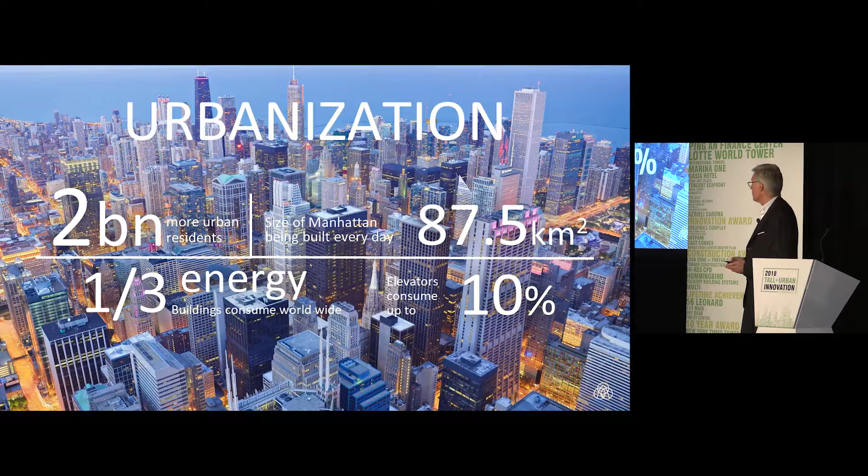Urban mobility. If cities will grow bigger and bigger, denser and denser, taller and taller, urban mobility, mobilization is a big issue. It's about transportation. It's not a singular problem. It's about automatic cars, it's about public transportation, it's about vertical transportation in the building, and it's more than that. It's connecting everything.

What we thought as a company, dealing with a couple of things like passenger boarding bridges, so when you enter the airport of O'Hare or others, you might meet us. We are also in the elevator escalator technology and in the home lift technology as well. So I think we have a fair share of knowledge when it comes to elevators.

But elevator is not what we were looking for. We have workspace costs, what everybody knows. Let's call it 1. We have 10 times as much cost for the leasing space. And additionally, we have 100 times the cost for our staff. So if this is all true, and it's not what I'm saying, it's what researchers will say, then office buildings are not as good as they should be, given the human capital we have in there. And the same counts for residential buildings, and of course, for all other sorts.

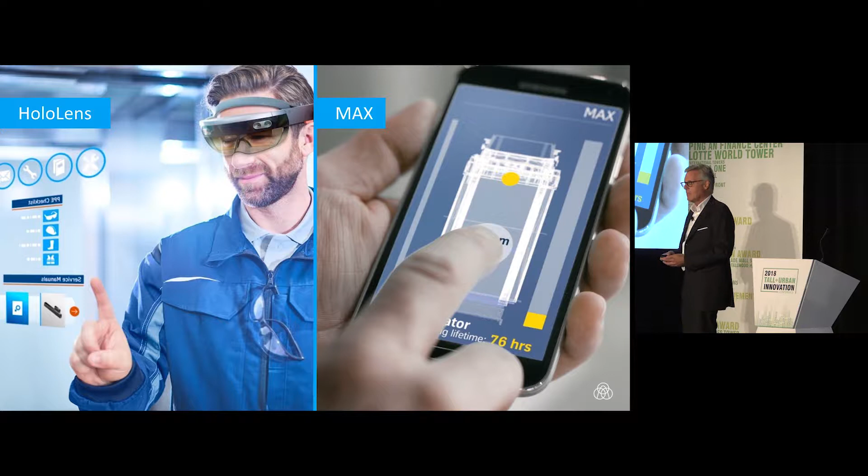But the second thing is now the next German company is coming and telling us about connection between software and engines. This is not the case. We are not in the diesel technology. What we do is in the energy part. So HoloLens, for example, is not a playing tool anymore. For us, it's an incremental part of how we see elevators of the future.

The HoloLens would provide us with ordering the spare parts right at the site. So somebody is sitting on top of the cabin or in the machine room or whatever, and if he faces a problem, he can call the chief engineer wherever he sits and ask for help. So he doesn't have to go away and come back, and we have downtimes in the elevator. We could solve the problem way easier.

And of course, what we call MAX is a little box where we take out all the data those elevators will provide us with. We do this with all elevators. But now we are talking about multi.

So what is multi? We were thinking about how can we reduce the consumption of space. I'll give you an example. You will see the project a little bit later. In Berlin, we are negotiating a building which is not very tall. It's Germany, so 140 meters is something. But the density is high, 4,200 people.

With a single deck elevator, so a normal elevator I would say, we would have used 22 shafts to get this frequency up and down. 22 shafts. With a multi, and this is sort of a drama, the multi comes later. With a multi, we came down to 8. So you can see that the thinking about how a core should be and how big a core should be is probably history. We can save at least 40% of the space. It depends, of course, on the building, on the footprint, and all these individual things.

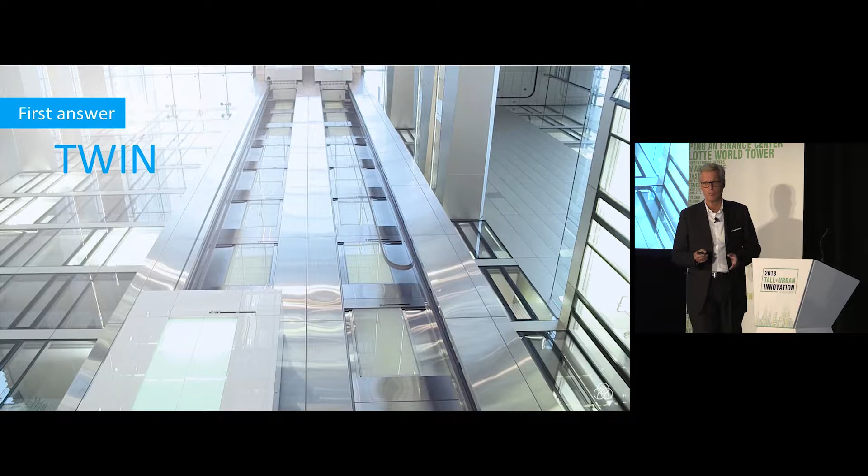And we have something which comes out of a consortium. It was Transrapid, a linear motor technology for trains. Actually, one of those is running in Shanghai, China, for 30 kilometers. And the technology was stopped. It was huge research in Germany, and only Germany can afford to stop such technologies after 15 years of testing. But Thyssen took over all the engineers.

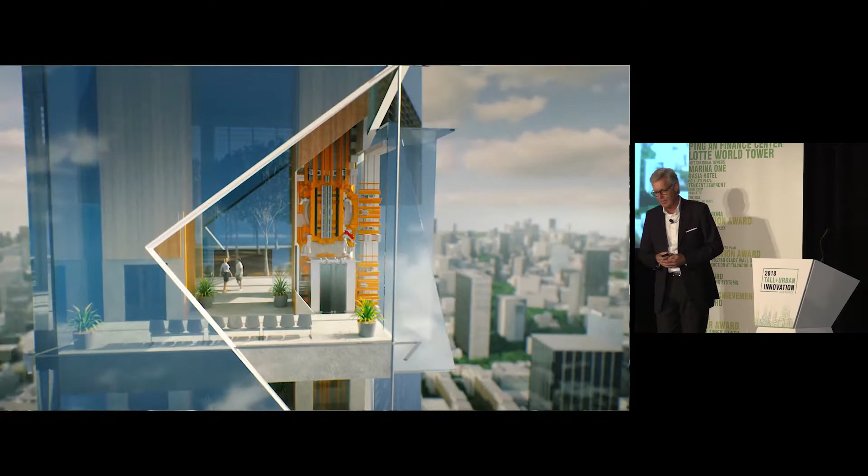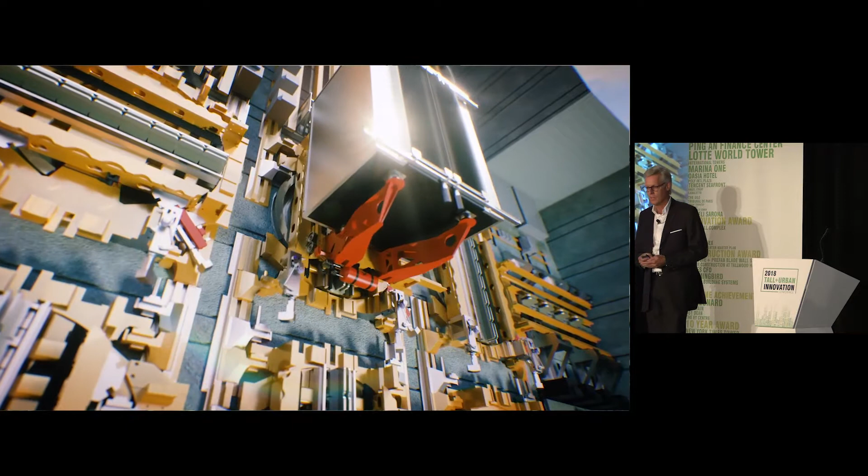How cool is this? So this is when Multi comes into play. Multi is the idea of the Paternoster, the idea of more cabins in 1 shaft, and the idea of linear motor technology, combined into 1 piece of technology. It's a combination of what you see here. It's not a rendering, it's the real world. We have it in a tower, which I will show you in a minute, in the middle of Germany, and we're testing it there, and we're going to make the first projects.

This is the test tower. By the way, it's built by Helmut Jahn. We are in Chicago, so homage to Helmut Jahn. And if I had the knowledge today that I have now, we would not have used a mass damper, we would have put in a rocket, of course. But instead of this, we took 12 shafts.

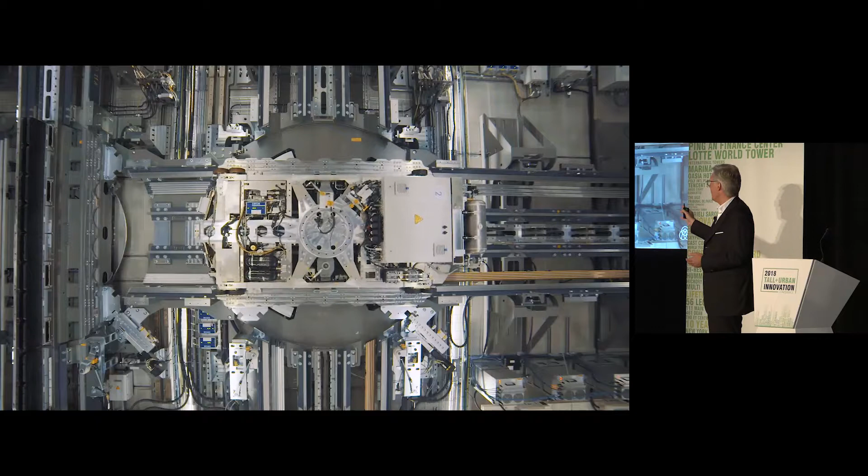And this is how the Multi looks like today. We love technology, you see that, right? It will be all covered when this thing is in your shaft, but for testing it's better to reach every single part. So the principle is we have multiple numbers of cars in 1 shaft, depending on the height, up to 10 or 15 in 1 shaft.

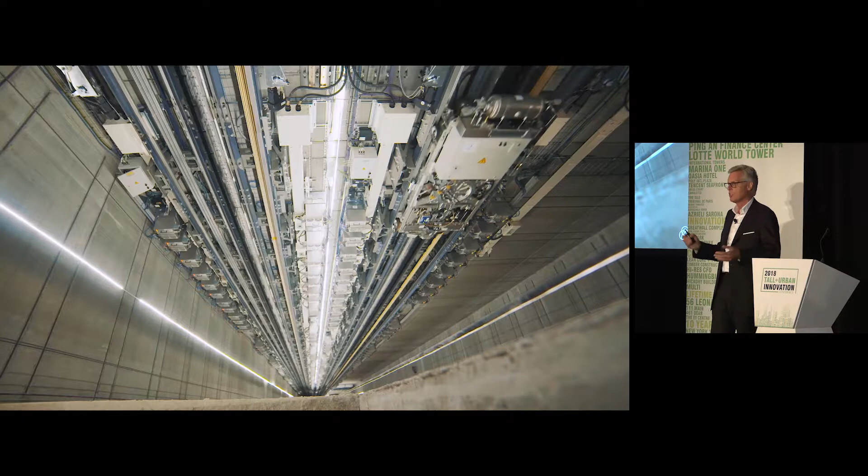We can go horizontally, so we can take cars away so the other can pass. We can create highways, country roads, and city roads in terms of traffic frequency. City roads are slow inter-floor traffic. Country roads stop every 5th or 8th floor, and the highways go down in one way. With going horizontal, you can swap those roads. This will increase the frequency rapidly, massively.

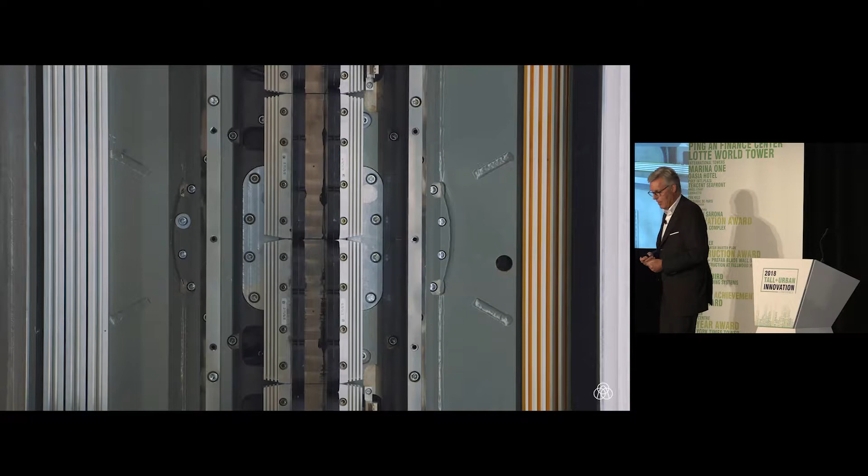By the way, this is a mock-up cabin. This is not how the cabin will look at the end. We are designing this cabin right now. But what you see in the next picture is how it could look like. This is a little bit over-dimensioned, so you need to see a little more detail, this is not the size of everything.

But having 4 shafts next to each other would mean that we can swap those tracks. We can make the speed of everything a little higher because we can choose which track we want for which cabin. So it's a bit of a merger of a train and an elevator. This is why we struggle to call this an elevator, because it's not. There is no cable on it.

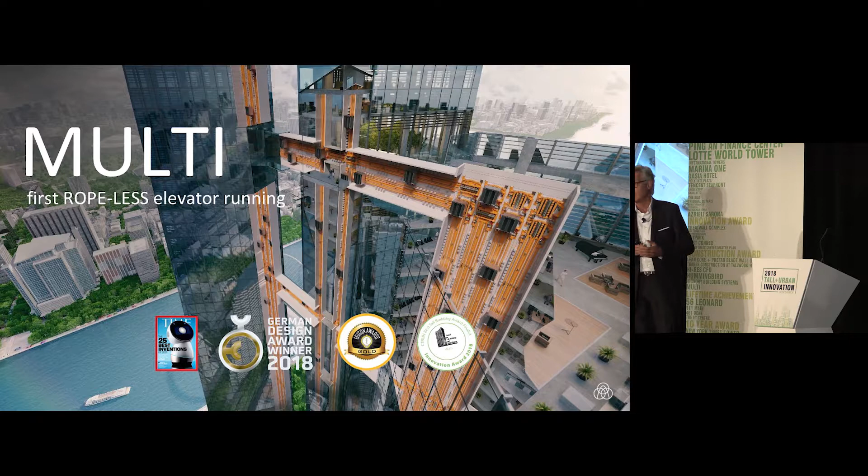You have seen it already, I guess. So without a cable, you can go horizontal. So an architect would say rope, but here I've learned, with so many engineers, it's cable. We are not using cable. We are using linear motor technology, which Markus Jetter behind me, the chief engineer for years, developed. It took over 7 years to get where we are now, and he knows every single screw in this machine. So who can better describe it than him?

The first project will be in Berlin. Why Berlin? Well, it's in Germany, so the flight time will be less stressful, I would say. But they are not the tallest buildings. So we will see the Multi coming up in all those areas you already know, like Asia, the Middle East, of course North America, and Australia.

Over to you. You thought I would use 30 minutes, right? You're perfectly in time. Thank you very much, Michael.

And now it's my pleasure, ladies and gentlemen, to give you a deeper insight into the technical world of Multi. Many of you, I noticed, have already been in Rottweil to our test tower and seen for yourselves what it is about. You could see, feel, almost touch it. And so I'm really sorry that today I have to go back to PowerPoint, as we already reached the point of power. But that's the case today, so I will do it.

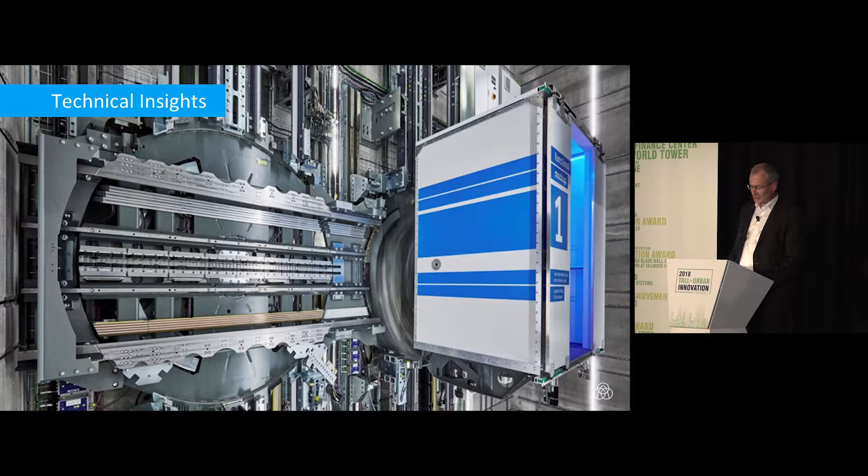But there you saw, and if you want to see it, just give me a call, that we have a fantastic demonstration of the different technologies we are leveraging for making MULTI a revolutionary game changer in people transportation systems.

Well, this linear motor technology Michael just talked about is the base for our ropeless elevator system. This is a dream in our vertical transportation industry for decades. We have a lot of experience in maglev high-speed train, but it is a big difference to realize a smooth propulsion system in a vertical direction.

And I'm very proud to tell you that we have achieved a fantastic performance level of levitating, accelerating, moving at high speed without noticeable vibration. And with this, we have an ideal individual motion control for a various number of cars. This is proved and available in our test tower.

And by introducing a completely new component, the exchanger we call it, we enable the liberated cars to move also sideways and wherever they want to go. The next dimension is available, and with this, an uncountable number of variations of your passenger transportation system in future buildings.

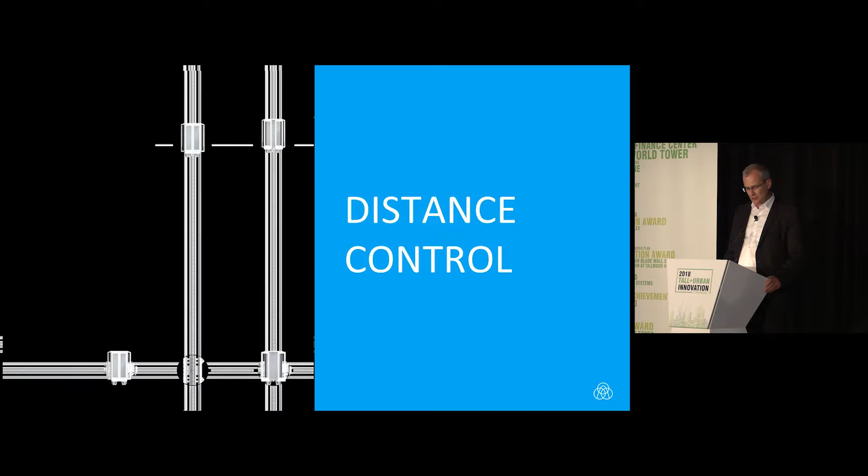Distance control, safety. The distance control and functional safety we have experienced since 15 years, as we introduced Twin in the market successfully. Now we go the next step with more advanced and high-performing safety control components, and control the safety of all cars and all safety subsystems.

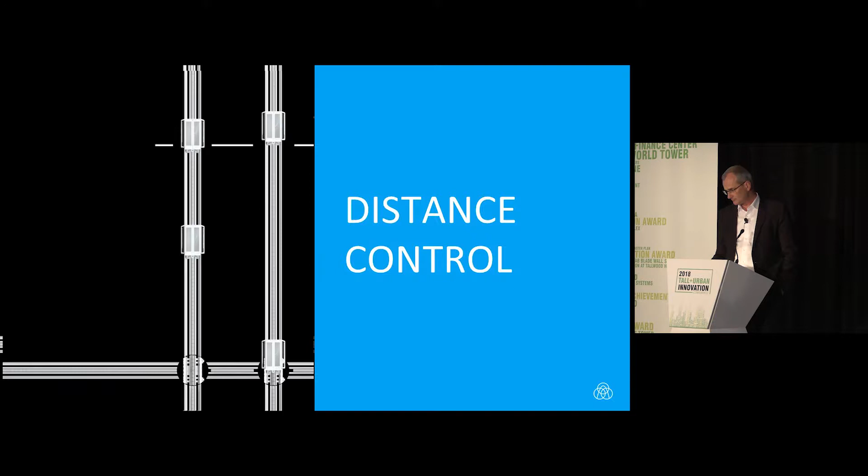Energy management. We manage the energy at the best possible level. We use the regenerated energy by cars going down on one side directly within our system, so not giving it back to the grid of the building. We avoid losses by this internal energy management.

With this, we manage the smart grid with dramatic reduction of peak power, and with this, of course, at the same time, the reduction of connected load and the operation fixed costs. We have a very high redundancy in the system with own energy storage using supercaps. Power failure with uncontrolled stops can be avoided.

A word about horizontal transportation. Many of you and the council, the CTBUH, challenged us to elaborate more on the tremendous new possibilities of moving people horizontally. We didn't have that in mind so much when we first designed and researched this new transportation system. So for this, we did further research and testing in a huge test lab in Germany to find the ideal maximum values for acceleration and jerk, very important for horizontal movement.

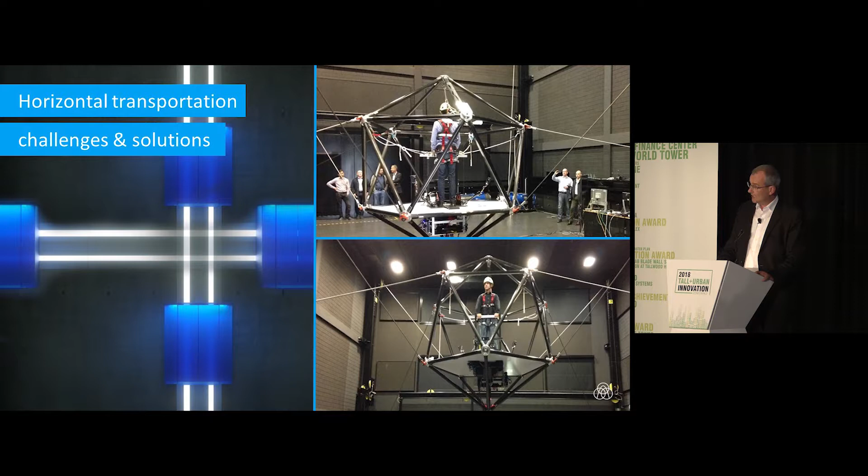Again, ride quality in our elevator business is the highest for all passenger transportation systems. So we can't allow uncomfortable accelerations and jerks.

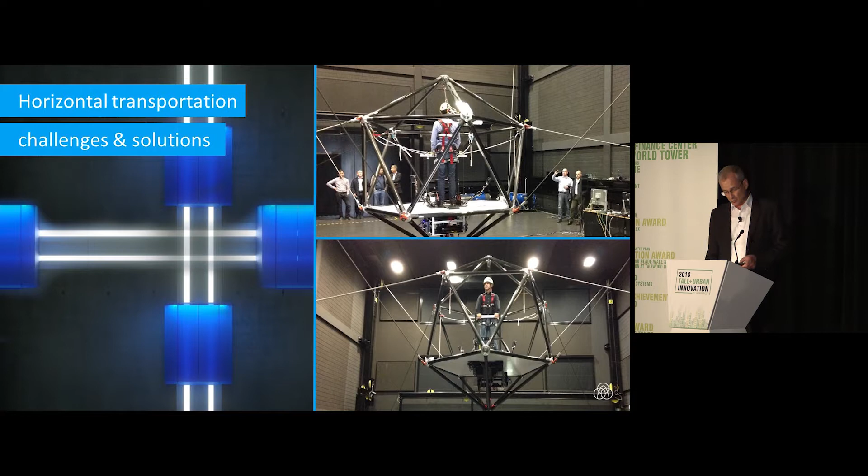With all today's available simulation tools, and we have heard a lot already today, like CFD, FEM, MBS, and you name it, we check all interactions between building and passenger transportation system. Building sway is no threat anymore for transportation system MULTI, as we got rid of the swaying ropes. This windy city will love to see less shutdowns of elevators.

I think I have a few seconds just for a quick story. The first time I came into this beautiful city of Chicago, it was together with my family. They're not as much touched by elevators and high-rise buildings as I am. So we agreed that they go shopping and to the harbor, and I go to the Willis Tower. I wanted to go up on the highest platform and see this beautiful city, ride the elevators, see how they are performing.

I was terribly disappointed. It was a windy day. The elevators had been shut down. I had to come back the next day. This should be and can be avoided in the future.

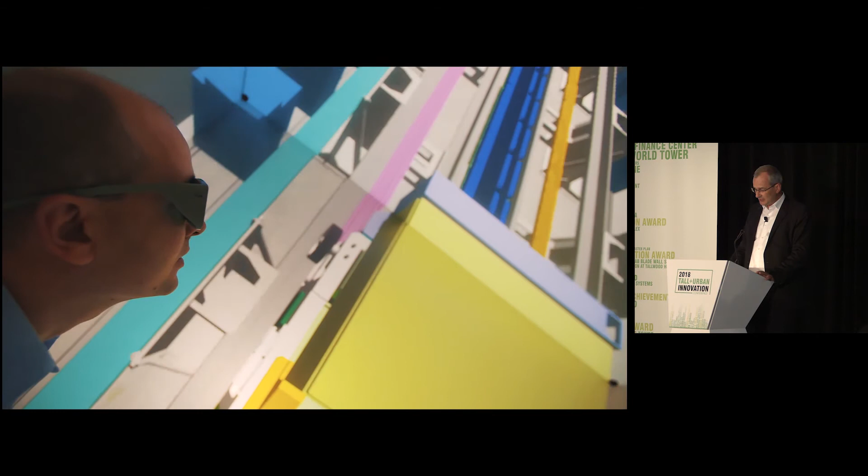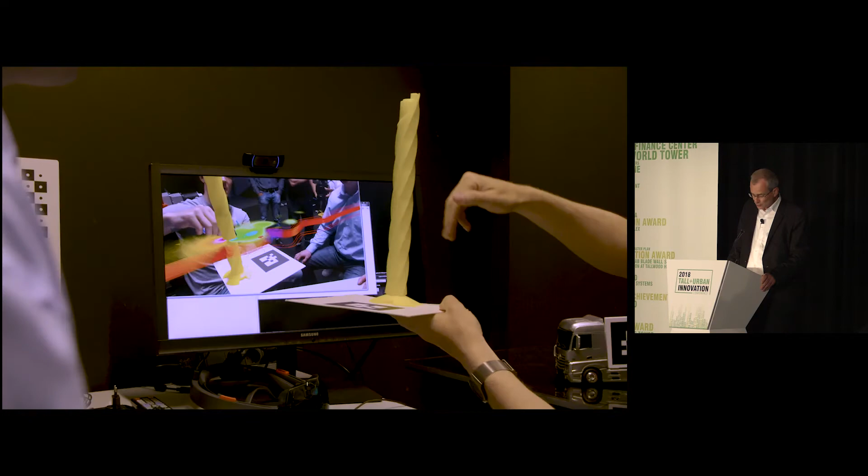And we are getting ready for the digitized building business. BIM ready, it's a necessity. We're working on digital twin, we're working on virtual commissioning, all these things which are necessary in addition to such a new transportation system. Just ready for a fantastic future of tomorrow's building with transportation systems that give you the benefit of digitization.

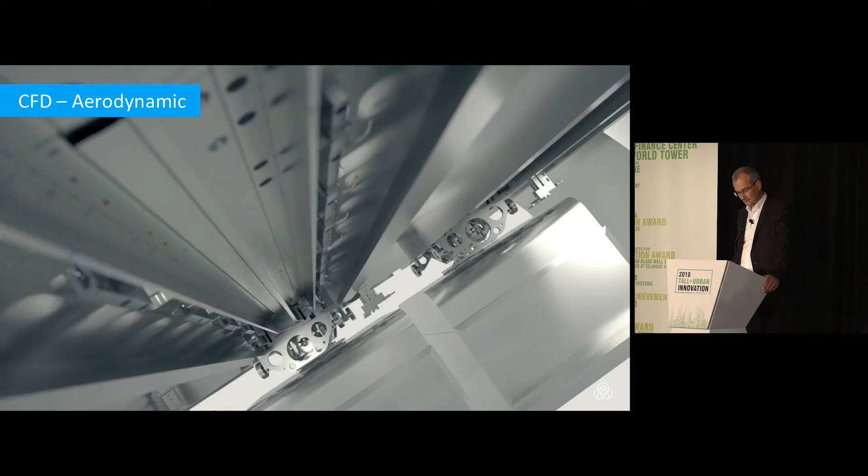Why are we doing this, investing so much in the future? And we are investing really a lot, including this beautiful test tower in this nice city of Rottweil. Why are we so enthusiastic about it? Well, we enabled high-rise buildings decades ago, 160 years ago. The elevator industry made it possible to have high-rise buildings. Today, we are rather limiting this business, limiting them with our roped systems.

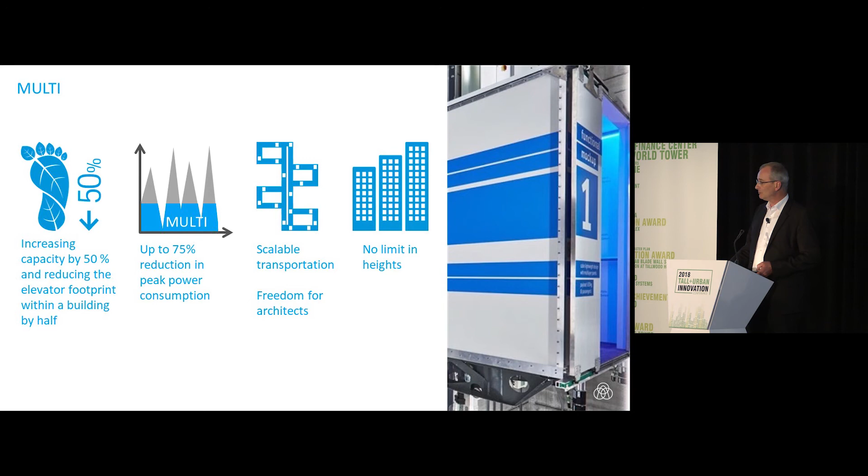So we really want to make a big step toward our customer requirements. They are main requirements, constantly coming up to us: increase your transportation capacity, decrease footprint and waiting times, decrease peak power and connected load, and no limits anymore in shape and height. This is what they are asking. This is what we strive for.

And with this, I'm closing with our statement, what we stand for and why we are presenting this today, here on this stage: MULTI truly revolutionizes building design, offering total freedom to architects and building developers. Create the best ever places to live and work while improving their business case. Thank you very much for listening.